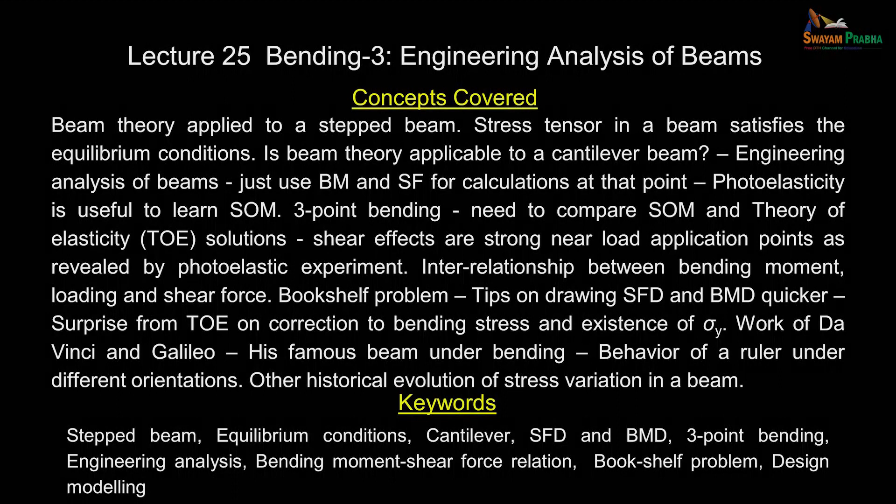Let us continue our discussion on bending of beams. We have developed the basic equations of strain and stress by considering the plane of symmetry. We got the expression of strain as minus M y by E Izz and sigma x equal to minus M y by Izz. On the plane of symmetry, we applied the loading also, and we got these expressions.

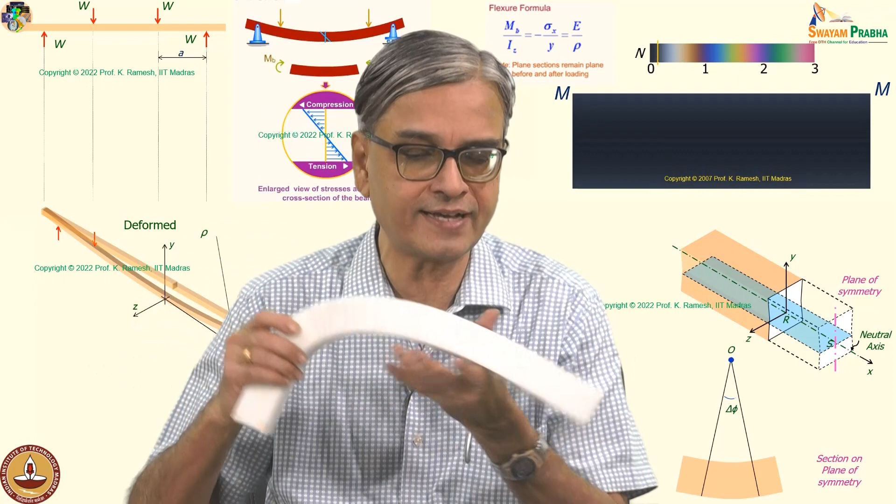We did not stop there. We took a counter example: suppose I take a beam like this and have large deformation. When I consider the thickness, what happens to the Poisson ratio effect? So we asked counter questions. When we developed the theory, in order to understand its limitation, we said because of Poisson ratio, you have anticlastic curvature.

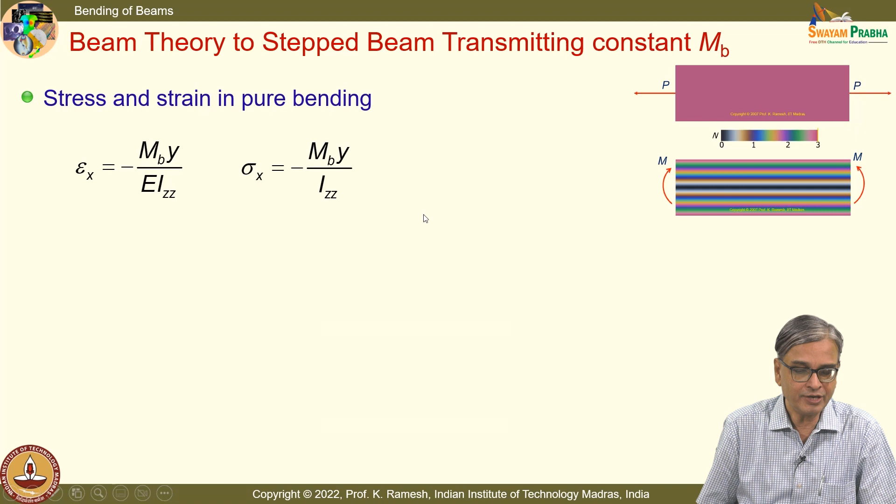Because we are working in small deformation, these equations are applicable. So we satisfied that. The moment I go to large deformation, I should work with the deformed configuration. We have not attempted to do that mathematics, but we satisfied that when I have small deformation, my equations are reasonably good. And we have also got the flexure formula.

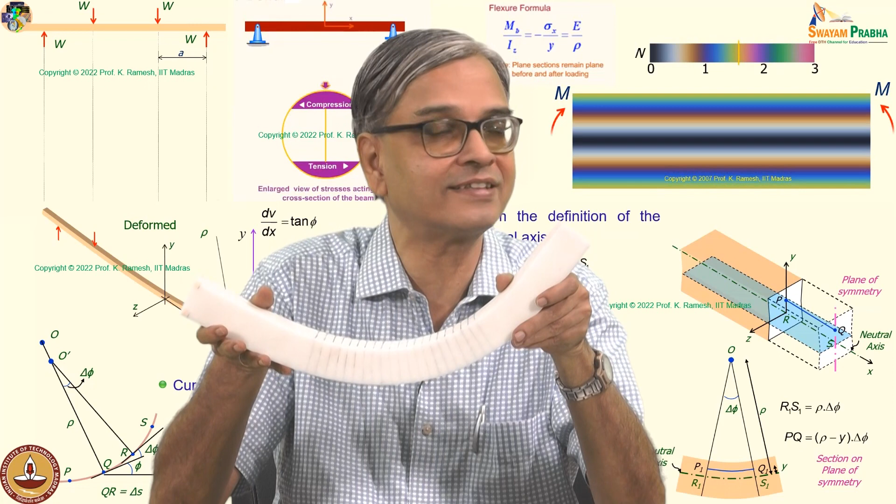I am not sure how many of you recognize that when I apply constant bending moment, the beam bends like an arc of a circle. Why? Because the bending moment is constant along the length, and the bending moment is related to the curvature. So you have arc of a circle.

And when we looked at a slightly different problem where I have a step, because in engineering practice you need a step so that you can locate the bearings, that's a simple modification I have made. But I have not done anything to the loading; it is still only pure bending moment.

When I have only pure bending moment, I get a very interesting result: away from this small zone having the step, I find the fringes are horizontal, and I also have the black line forming at the center. If you noticed the animation, you would have seen that black line was initially very broad, and it was becoming sharper as we increase the bending moment.

Like what we have seen in a beam of constant cross section subjected to pure bending, you see the same features even in a stepped beam. And you also have the definition of neutral axis: in the neutral axis, when I have a triangular variation, the stress value is zero.

You know, in photoelasticity we plot sigma 1 minus sigma 2. Both sigma 1 and sigma 2 are zero, and you also have this neutral axis. It was a very comforting scenario that whatever we developed based on a simplified appreciation of the deformation, we got the solution, and the solution is valid.

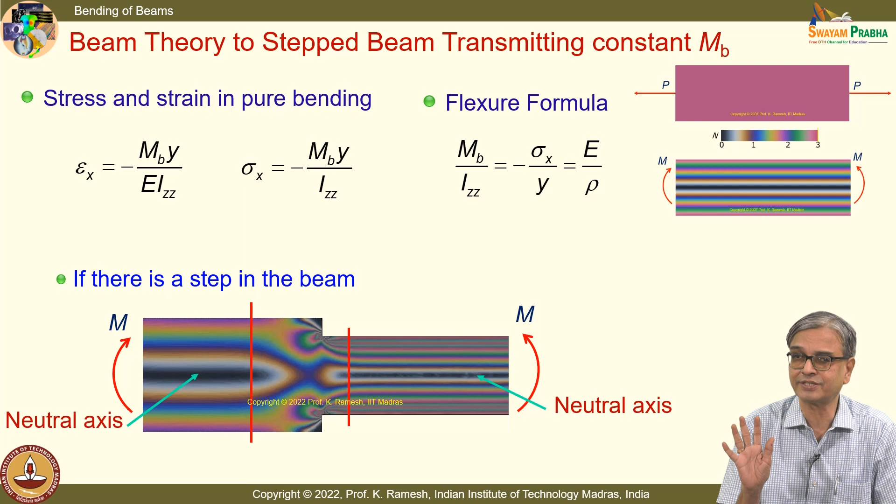Whenever we discuss, we will also have to look at exact solution and compare ourselves, to check if we are getting the right solution, which is done. And what you do is that in theory of elasticity. Even though I am not going to take theory of elasticity in all its completeness, you just look at what happens to this point A.

You know from your bending equation that sigma x is given as minus Mz y by Izz. And I said that you should cultivate the habit of looking at the stress component and putting that as a stress tensor. And what we have developed are differential equations defining the equilibrium of the solid.

We have not used it in this course till now. And whole of theory of elasticity utilizes these differential equations, solving this problem as a boundary value problem, and you get the solution which is exact, where you don't make assumptions about the deformation. You evaluate the deformation as part of your solution.

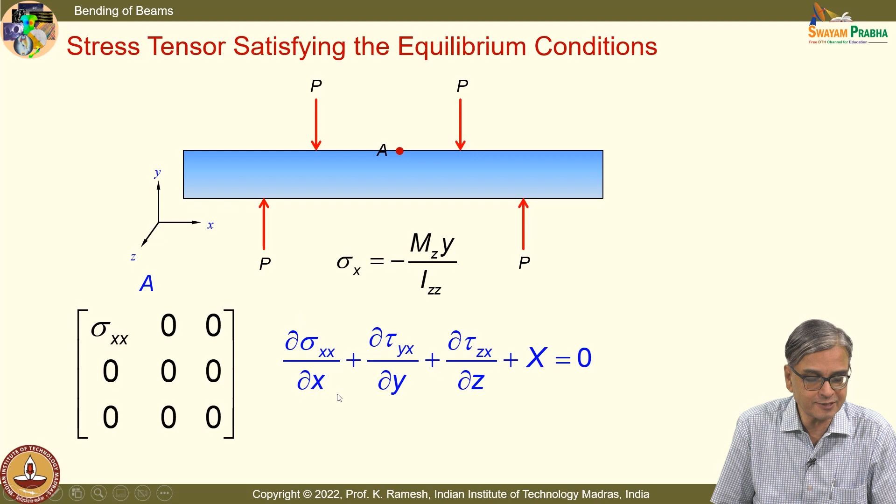And if you look at this, in the absence of body force, we have already said in strength of materials that shear stresses do not exist because I apply only pure bending. I have only sigma xx, and sigma xx is found to be a function of only y. So when I differentiate with respect to x, it goes to zero. It satisfies the equilibrium condition.

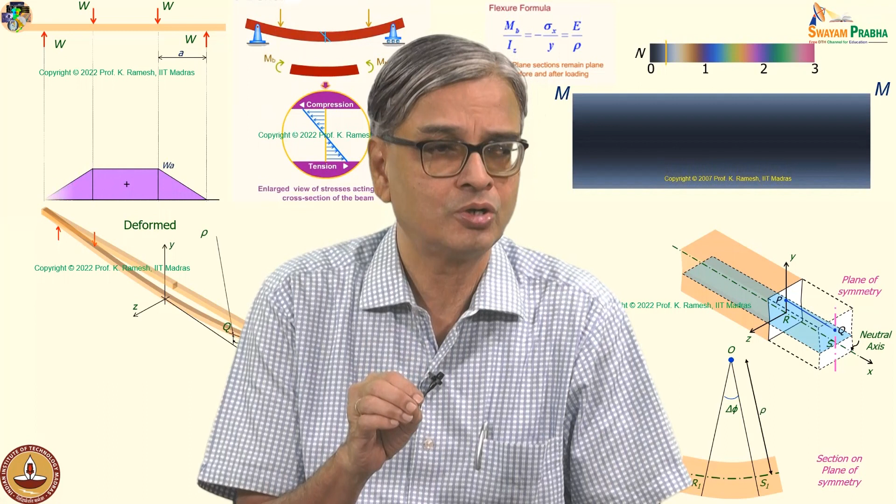Is the idea clear? So any problem that you do, you verify your solution with an experiment, whether it is an experiment based on bending of a beam like this, or when you look at photoelastic fringes. If the experiments are carefully done, what you get in an experiment is truth, and your theoretical development should conform to that. If it is not conforming, then you must find out what is its limitation, and in what way we can improve.

So you should always keep track of that. Experiments are truth if they are performed carefully. If you don't do the experiment carefully, then there is no fun.

Now what I do is ask a question: can beam theory be extended to cantilever beam? I make only one small modification. In the earlier problem, we didn't have shear force. In this problem, I take a shear force which is constant on the length of the beam. Because it is constant, I find the bending moment varies along the length of the beam. It does not remain constant, it has a linear variation.

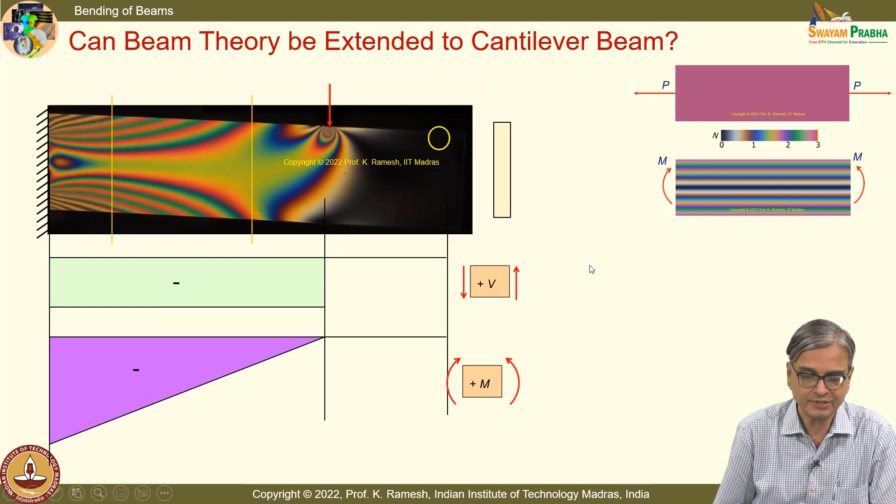Now, what I have here is, I have the bending moment varies linearly along the length of the beam. That means when I go from this point to this point, the bending moment is increasing. Suppose I say I can use the flexure formula, which I have it here, and then I put the bending moment corresponding to what I have in the bending moment diagram and evaluate the stresses.

The bending moment is varying linearly, and when I move along this direction, you would anticipate stresses also increase. If I have stress occurring here, the same value of stress occur at a lower place because the bending moment is higher. Is the idea clear? That is happening.

The bending moment is varying linearly, but I find that this is not varying linearly, but this has a curvature. The observation is correct. But you have one more difference.

I have a bending moment varying along the length of the beam. I also have shear force. I have a new addition because of the way the beam is loaded. So I have to account for what way this shear stress is going to influence. The shear force is going to cause you shear stress. And long back we have discussed, you have this as a free surface, this as a free surface. You can find out the distribution of shear stress variation from our strength of materials. Whatever result I get, because it is a free surface here, free surface here, this should go to 0 at those points. That we have made it clear.

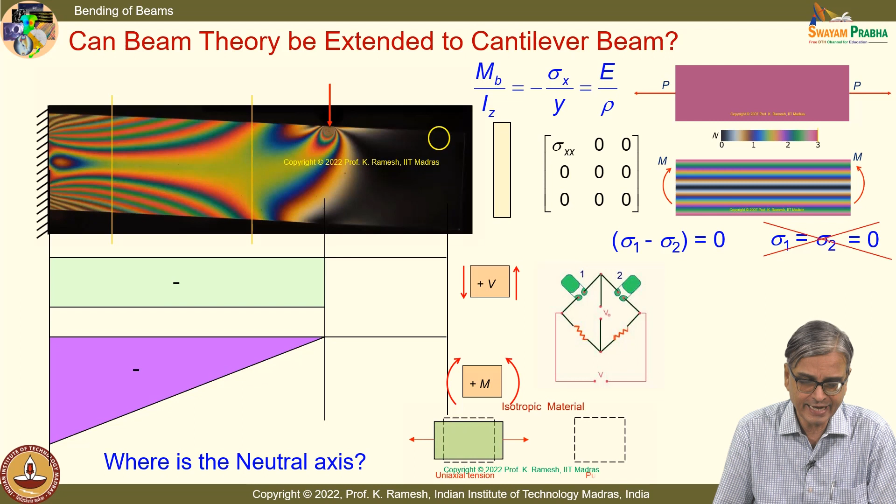At this stage, what we say is you can extend it to analysis of a cantilever beam. The moment you say it transmits shear, I am going to get shear deformation, which will violate plane sections remain plane before and after loading. So I must call whatever analysis I do as engineering analysis of beams. Your exact analysis stops at pure bending—anything other than that, even though we exploit those expressions, you need to carefully look at that as engineering analysis.

I was quite happy that you have done a beautiful set of experiments. This is what I said: when you do the experiment carefully, experiment is truth. If you don't do the experiment carefully, experiment is not truth. And whoever obtained this fringe pattern, I should compliment, because it's very difficult to handle this model in the polariscope and apply load with your hand.

When you do an experiment, you also anticipate results—no one does the experiment blindfolded. Before you do the experiment, you have a hypothesis; you want to see whether my experiment gives that hypothesis. Because I have been repeatedly showing that you get constant color in the case of axial force, that has prompted you to adjust your loading so that you got constant color. The same experiment done by some other group, you didn't get constant color for the entire length.

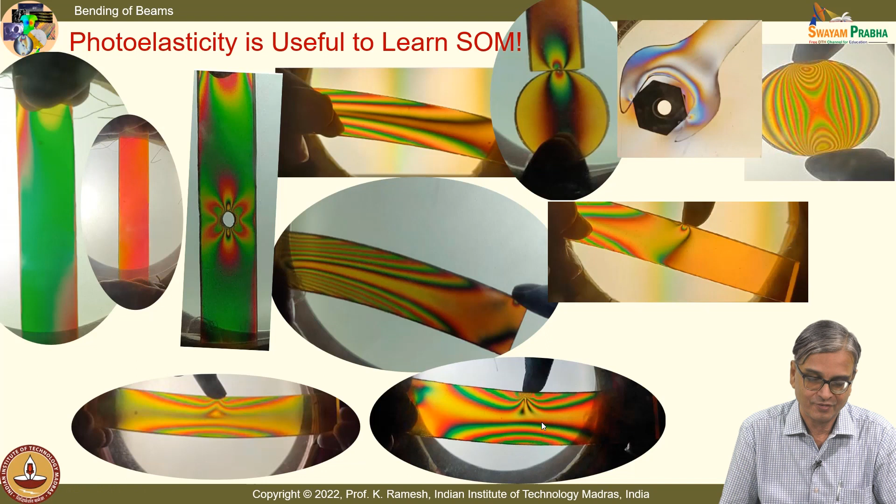And you have also done 3-point bending. This needs a little more attention—we have to see whether my theory, my strength of materials solution, is giving me the result in all its completeness. We will initiate the discussion; you have to wait for shear force development to complete the discussion.

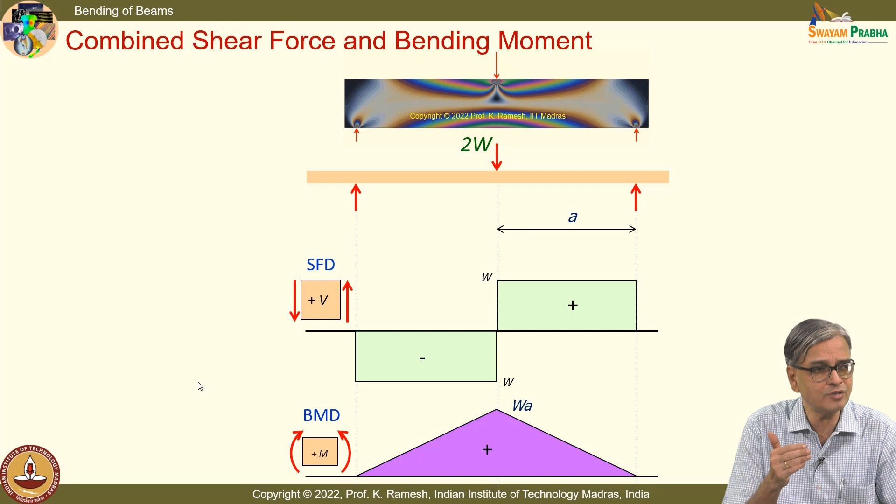I have this as a 3-point bend, very similar to your cantilever, because when you look at it, the shear force is constant and your bending moment is varying linearly. So if I can apply my strength of materials solution to a cantilever beam, I can also apply it to 3-point bending, because this shares the same feature on both sections.

I would like you to take a photograph of this, because these fringe patterns are very interesting. That needs to be looked at and discussed.

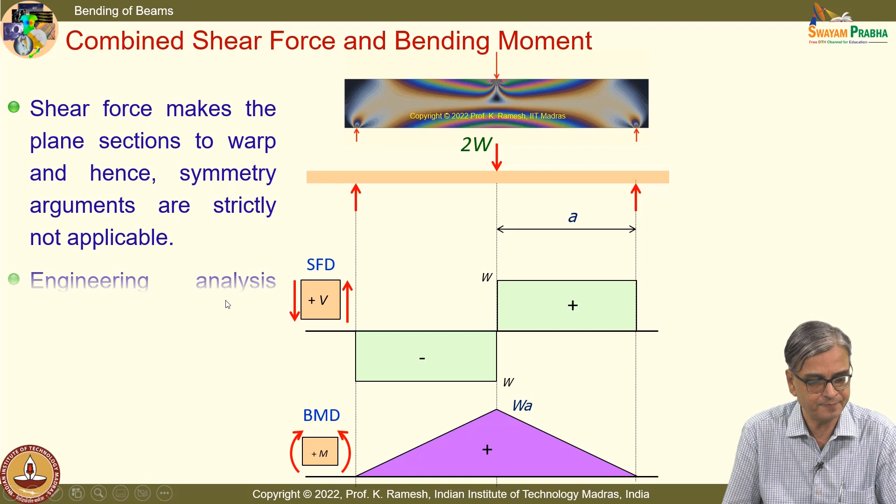The moment I have introduced shear force, it is going to warp the section, so symmetry arguments are strictly not applicable. I want to emphasize, we don't give up as engineers. We do the analysis, recognize that we have made an approximation, and label this as engineering analysis.

So the bending stress distribution is valid even when M varies along the beam. Now we will have to investigate how this is influenced by the shear stress introduced. Whatever fringe pattern I have shown here agrees with the theory of elasticity solution, and we have to investigate how they compare with the strength of materials solution.

If I have to compare it with the strength of materials solution, I should also know how to calculate shear stress variation across the depth of the beam, which we have not done till now. We know only the bending stress distribution.

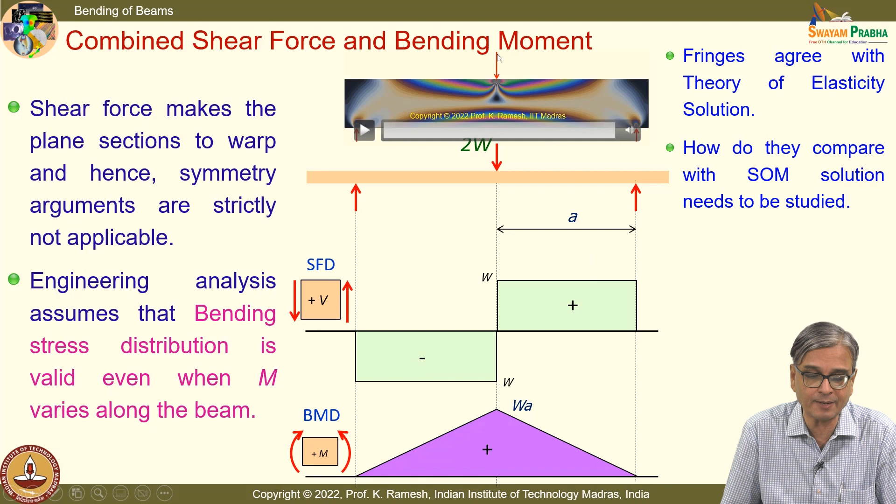At this stage, I want you to observe how the fringe patterns are. I am also having a bigger blow-up of the fringe patterns developed. What I want you to observe is that the bending moment is varying linearly across the length, it's increasing.

We have seen that the fringe is having a curvature. When you come closer to the load application point, this curvature has a sharp turn. Is the idea clear? Do you make that observation?

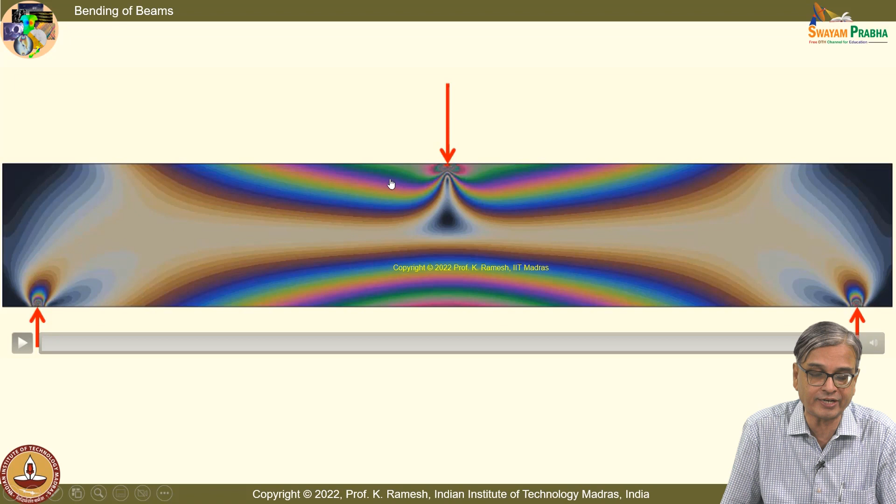We have to understand whether my strength of materials solution, what we are going to develop in terms of shear stress, is good enough to capture these or not. You'll have to wait, but have this observation in mind. When we develop the discussion, we will find an answer.

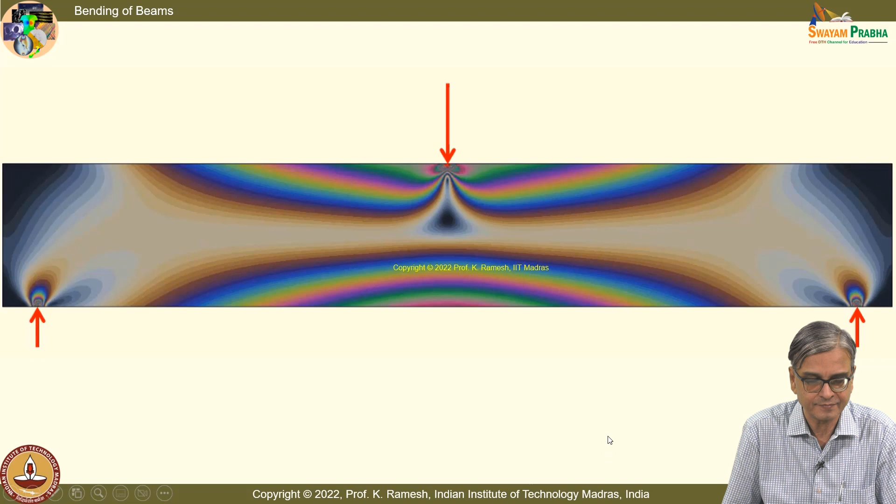The moment I introduce a shear stress, I am not going to have these sections remain plane anymore. They get deformed, and this is based on the final solution.

You can make certain observations of this. See, this line is perpendicular to this free surface. So when the deformed section is perpendicular, that means the original 90 degrees is preserved. What would you say about shear? Shear is zero. Shear is a change of the original right angle.

Is the idea clear? I have also made a conjecture that shear is maximum at the center of the beam, and I have the maximum deviation from 90 degrees at the center zone. So the plane sections have warped.

Our whole beam analysis was based on the premise that plane sections remain plane before and after loading. On that basis we calculated the bending stress distribution and bending strain distribution, and that is clearly violated even in the simplest case of a simply supported beam.

Where does this influence apply? That's question number one. Question number two is, what is the variation of shear stress? Question number three is, what is its magnitude in comparison to bending stresses? All these aspects are important.

First answer is, as long as I have a slender beam, meaning the depth is very small compared to its length, shear effects can be ignored. When the depth increases, you have a coupling between shear and bending effects. There, unless you bring in the shear effects, your beam theory solution is not complete.

You also have idealizations for that. Bringing in shear effects, you have what is known as the Timoshenko beam. That's all postponed for your higher level of education. For this course, we will confine to strength of materials, and shear stress variation over the depth of the beam is non-linear.

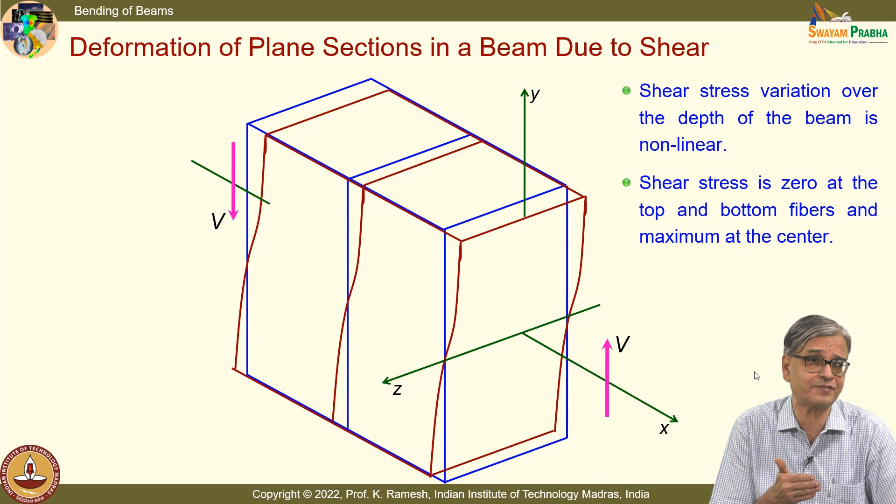We have always seen that in the case of twisting of a shaft, shear stress was varying linearly, and in the case of a beam, axial stress was varying linearly. We find that shear stress variation is non-linear. As we conjectured based on the free surface argument, shear stress is zero on the top surface as well as the bottom surface, and reaches a maximum at the center. I gave evidence from photoelasticity fringes that it was no longer black—I have a color.

We'll also have to handle a loading that is varying on the beam. One of the things you normally take, particularly when dealing with civil engineering construction, is that self-weight itself is a load acting on the beam. This you have already developed in your earlier rigid body mechanics, and this is how you verify whether you've drawn the bending moment and shear force diagrams correctly in comparison to the loading diagram.

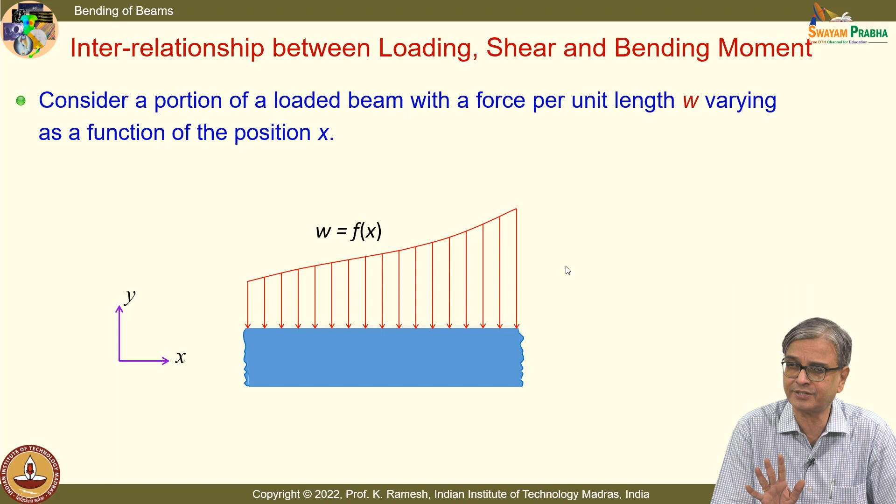It's only a recapitulation, not a new derivation. Recapitulation with the symbol for how we label positive shear force and positive bending moment. That's the only difference; otherwise this you have already done in your earlier course.

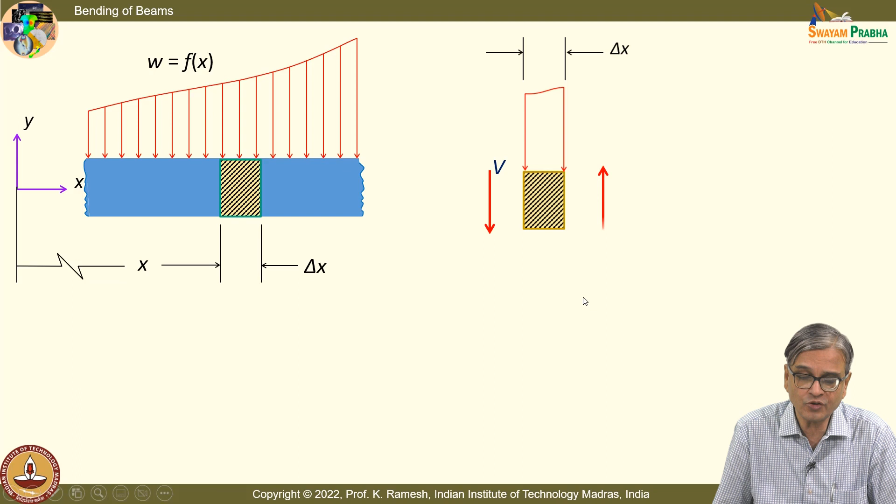So I take a small section and write all the quantities I know. I recognize this has a finite length delta x, so I anticipate there's a variation of shear along the axis, and also a variation of bending moment along the axis. We take a positive surface with positive direction of shear as positive. The only difference is we've learnt it in a different symbolism of sign convention. Otherwise you have already been taught how to get this.

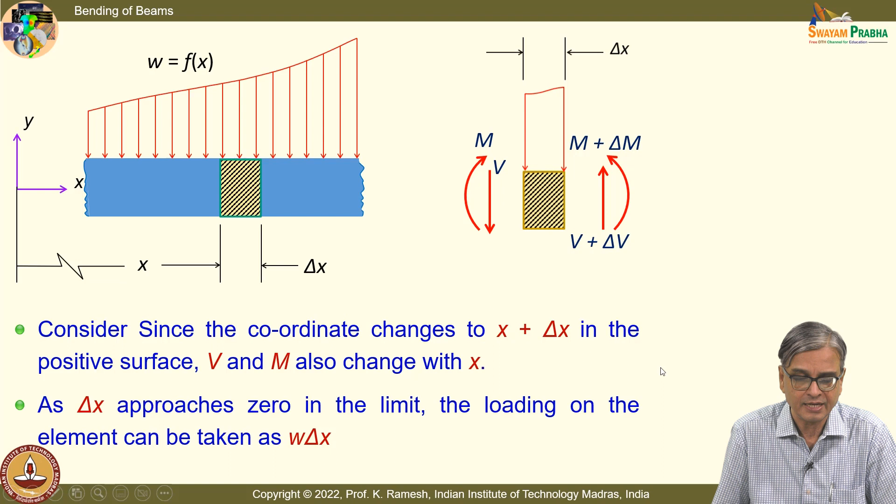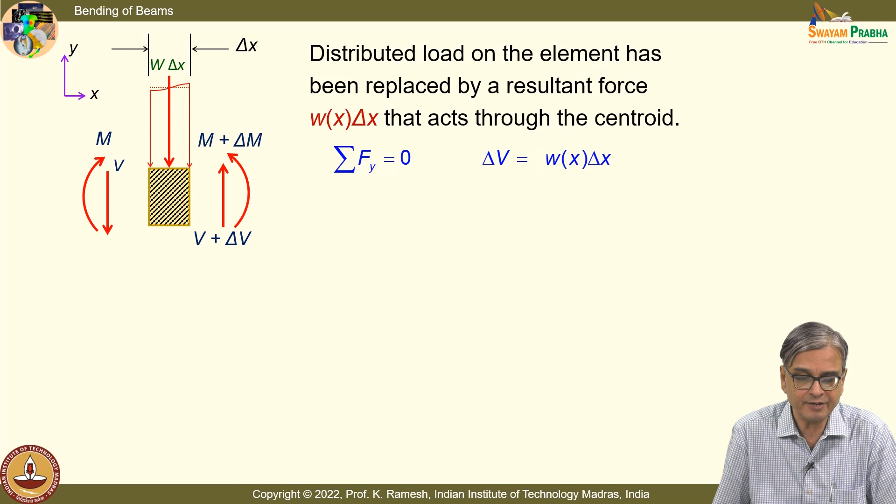In a short distance delta x, I can put the value as w into delta x, and replace this as a force. I can write the force balance and get the interrelationship. So if I do sigma Fy equals 0, in the limit delta x tends to 0, I get the important relation dV by dx equals W, the intensity of loading.

And when I do the same for moment equilibrium, I get another interesting result: dM by dx equals minus V. If you had used the opposite sign convention, you would have gotten dM by dx equals V. That's where the difference comes.

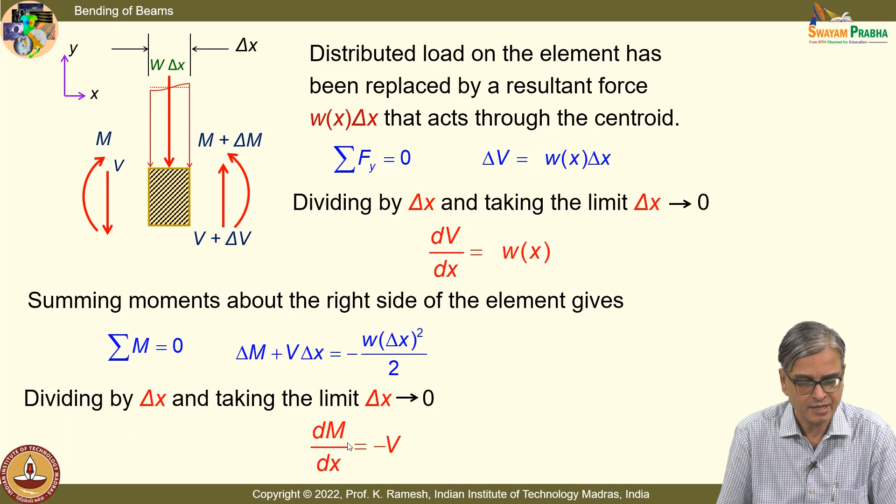What this says is, if I know the shear force diagram, I can comment on the slope of the bending moment diagram. That's one way you verify your plotting by hand. If you have an equation and put it in software to plot, the software will faithfully fit the curve. But when you do hand plotting, you have to know how to do it.

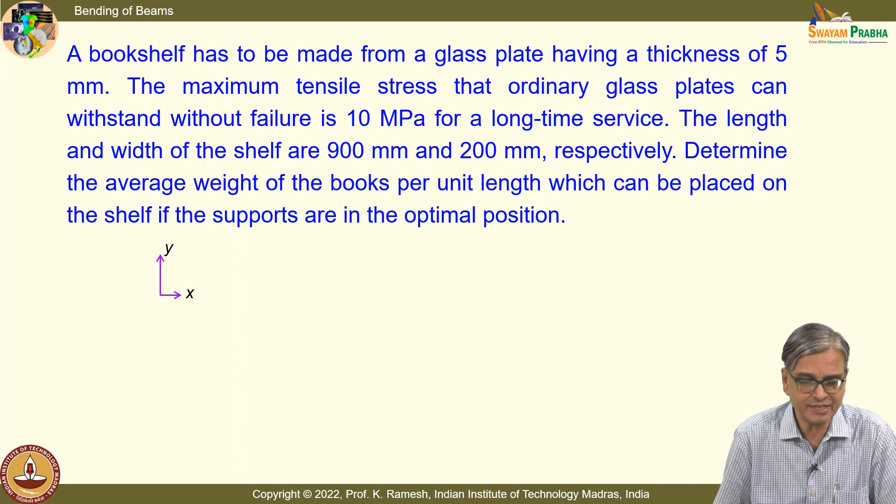Let us solve one very down to earth, simple problem. At the same time it's very interesting, and it also has components of modeling. Consciously, I want to bring this in -- you become better engineers only when you know how to do modeling.

First, when you have a stack of books, none of them -- if you take 5 books, each will have different weight and different size. You don't have one uniform book unless you buy an encyclopedic volume published from the same publisher; if you take 10 of those, they'll have the same size and weight. But if you buy books in fluid mechanics, solid mechanics, material science, all of them will be different.

So the first idealization you have to make is to translate this into a uniform loading. You should not exceed that -- that's what I want you to recognize.

What is given is you can make a nice, elegant support with a simple glass plate, of length 900 millimeter and width 200 millimeter. It can accommodate many of your books. The question also asks to determine the average weight of the books per unit length which can be placed on the shelf if the supports are in the optimal position.

You have to understand what is an optimal position. In fact, there is an embedded clue in the question itself: the supports are not put at the end. They're put in a manner such that the length A is greater than L by 2. You are given a clue.

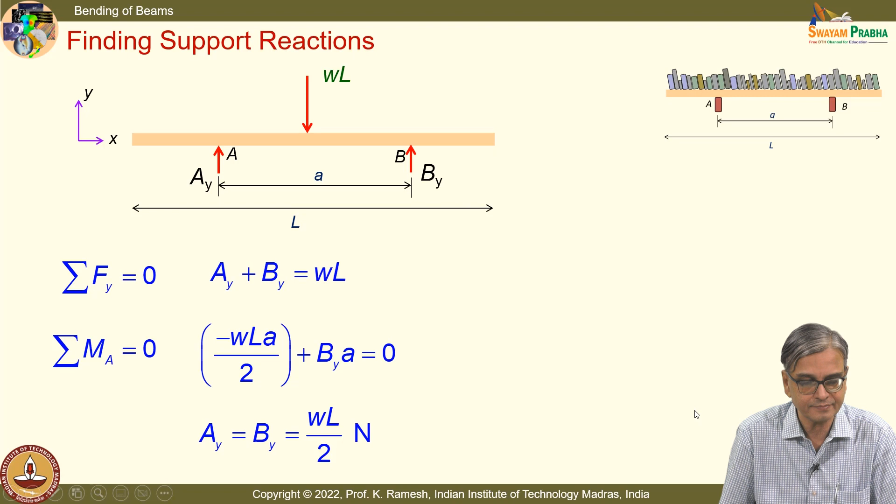I've also been saying that for a problem like this, you should be able to draw the bending moment and shear force diagram quickly. So if you give me this, I will find the shear force at this point, and at this point -- that's good enough for me to draw the complete shear force diagram. And for the bending moment, I'll also find what is happening at the center. So 2 points are sufficient for the shear force, and 3 points are sufficient to draw the bending moment.

Because the loading is W Newton per meter, I anticipate my shear force for the entire length of the beam to be a first degree curve, because I know dV by dx equals W. When I go to bending moment, I have dM by dx equal to minus V. So if the shear force is a linear curve, bending moment will be a parabolic curve. So all that information you use it.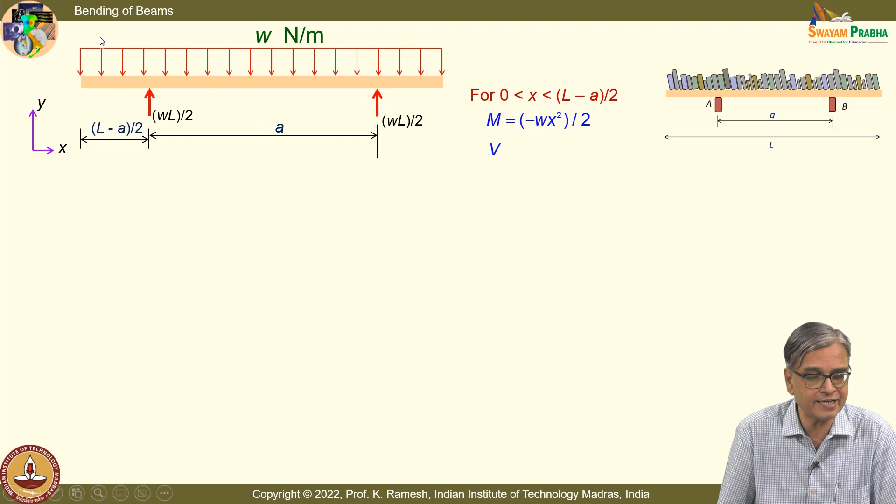If you do from the conventional point of view, I can find out what is the expression for M. If I take a section and then do it, I can do this. So I will do that for one section, another section, and the third section. That is for completeness. Completeness, you have these expressions. I can get it for this.

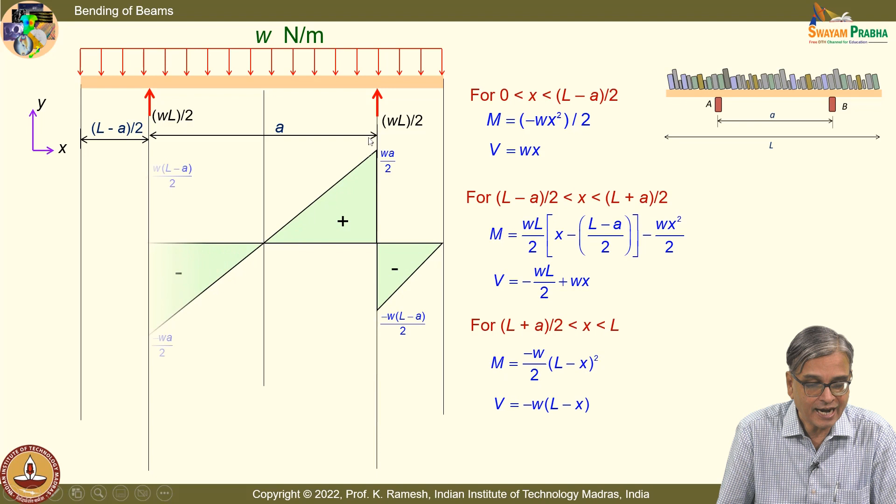But when I want to plot, when I start here the shear force is 0 as well as bending moment is 0. So I know 2 points already to start with. At this support I have WL by 2. From this point, I will go up by WL by 2 - that's what your mathematics also will give. If I know this point, I know this is a straight line, I'll join these two. Again, go up by WL by 2, and then come back to 0. So you can draw this very quickly.

You have to build up that acumen. As you learn the course, you can't be saying that you will take half an hour to solve this problem.

And similarly, when I go for the bending moment, I know that this is a second degree curve. The question is whether I should draw it like this or draw it like this. That you look at based on your slope. See, slope is 0 here, slope is positive here. You have dM by dx equal to minus V. When V is 0, slope is also 0. When V is more and more negative, slope is also more and more positive. So that is how you decide why I have to plot the curve like this.

Now you can quickly say, as an engineer, suppose I put the support at the end, what would be my bending moment diagram? Bending moment diagram will be a parabola from this end to this, and your bending moment peak value will be much higher than this. Do you see that difference? So one clue you get is, by adjusting the support, you can achieve a situation where you can minimize the level of bending moment maximum occurring in the beam. So that is a design tool.

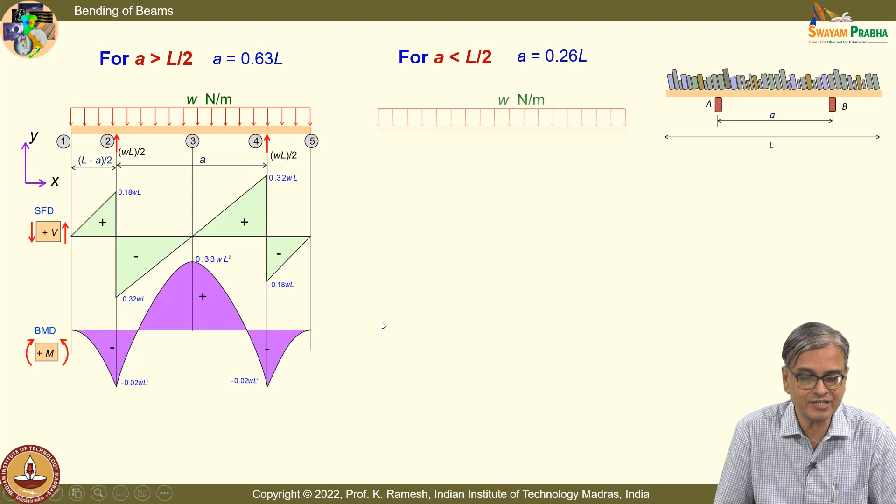When I have A less than L by 2, I have everything on one side. If I start from this, I will not be able to find the optimal position at all. Only if I start from this kind of bending moment diagram do I have the opportunity to find the positive and negative bending moment and equate the two.

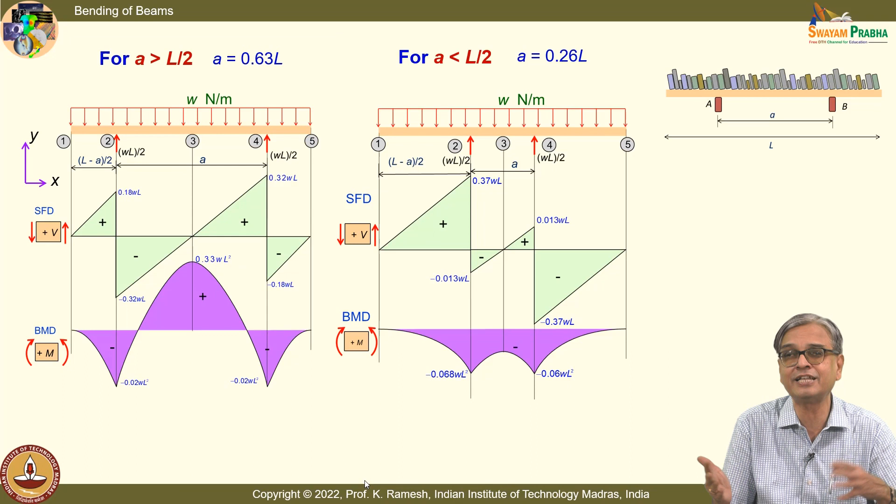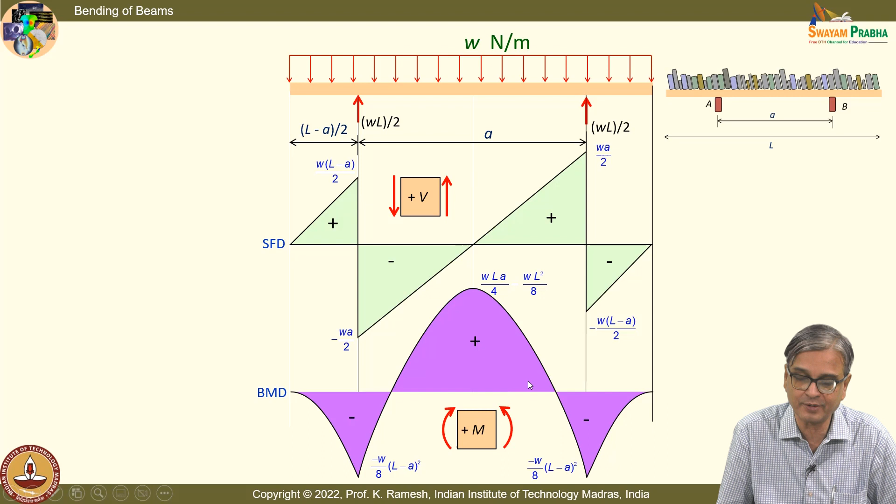So it's a design scenario. What we do is simply equate the two magnitudes. The same shear force and bending moment diagram is replotted, and I equate these two values.

I get a quadratic expression of A squared minus 4AL plus 2L squared equals 0. From this I can solve for the value of A. This means I have adjusted my supports such that the bending moment peak here and this peak are of the same magnitude. That's the best optimization I can do for the given problem.

When I substitute this, being a quadratic expression, I get two roots. You have to select the appropriate root—only one will lie within the beam. So I have this as 527.21 millimeters.

Once you substitute here and apply the beam theory, hopefully the beam theory is applicable—we have to verify this with theory of elasticity, which we have not done yet. We will also do the verification, and if the deviation is small, we keep our eyes half closed, pat our back, and say I have got a value good enough for my design. This is how engineers operate.

You have to get the core of the problem—that is more important. The core here is that bending stress varies linearly over the depth of the beam, whereas when I apply an axial load, it is constant.

Recognizing that it varies linearly was the biggest challenge the scientific community faced—it took 200 years. You should recognize that. We will also revisit the history today, because now you are more equipped with beam theory, you can appreciate what aspects they could reveal and what they could not find out in their development.

So I have this bending moment equated, and you get this expression. When I substitute the value of A which I calculated, I get the maximum bending moment magnitude. And I have the bending equation available—whenever you solve a bending problem, write this in one corner and start, because you are going to exploit this equation. So I can write sigma bending max as M B max divided by I ZZ into y max.

Then you have the cross section like this, with breadth and height. So for this rectangular cross section, here's how to calculate the moment of inertia. And when I use the information given in the problem that it cannot exceed 10 MPa...

I find out what is the value of W. I have this as 0.48 Newton per millimeter.

Let me ask you a few more questions. I am not going to give you the answer—I want you to think. Suppose I want my W to be not 0.48, but doubled. What are the options that I have to do this?

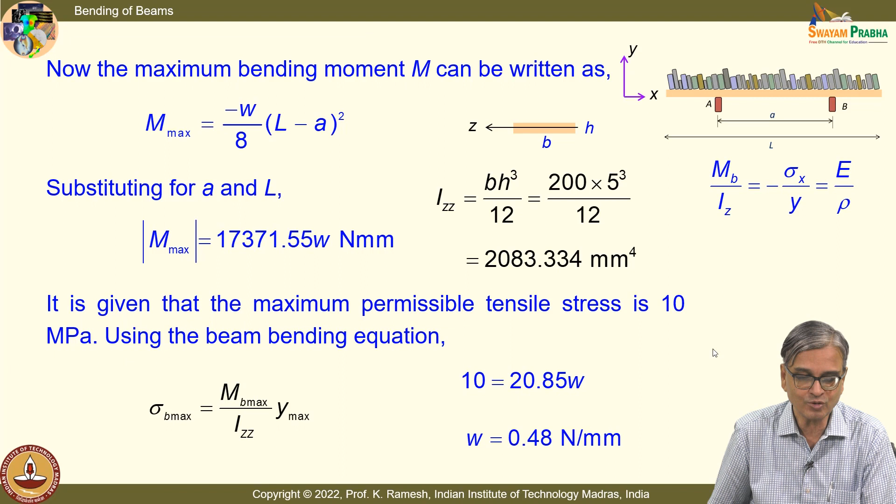Now let us look at whether this is supported completely by theory of elasticity. There are surprises - you have not calculated the shear stress. You can take it that this is varying parabolically, non-linear, anything other than linear we'll say non-linear. It may even be a simple second degree curve. We have obtained from strength of material that bending stress varies linearly. Please make a sketch - this you will not find in any books you have access to. Also appreciate stress magnitudes are not to scale - we are only discussing the variation over the depth of the beam. You will find that what we get from strength of material up to this point is perfectly correct.

We have also done discussion on free surface. Suppose I want to discuss what happens on this surface - is this surface free? I am deliberately applying a vertical load, so how can that be free? In the development of bending of a beam with constant bending moment, we have idealized sigma y as 0. But this is one of the most common loadings that you have, and you are definitely applying sigma y - you are applying a force to generate sigma y. So when I solve the problem as a boundary value problem, taking the differential equations, I am definitely going to have sigma y, and it will die down to 0 at the other edge.

And there is also another surprise: even the linear variation of bending stress is no longer supported by theory of elasticity. You have a correction term to sigma x. So you have two additional quantities - sigma y exists, and I have not drawn these to scale. You will find that these are second order effects. The small variation can be ignored when you use the expression for bending stress which was developed in strength of materials. Is the idea clear? So you have to understand that we are doing only engineering analysis, and you have to appreciate the limitation.

And I have raised a point in a 3-point bending. There is something we have to discuss about the shear stress, whether strength of material predicts it correctly or not. You have to wait until we develop what we do in strength of materials, then compare it with theory of elasticity. So you should appreciate that whatever expression we have got in strength of material is very useful, but it has its own limitations. Appreciate the limitations.

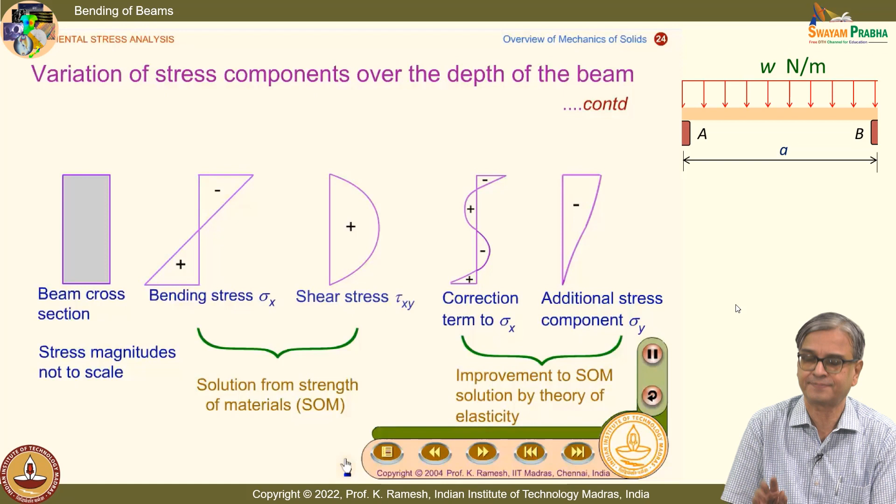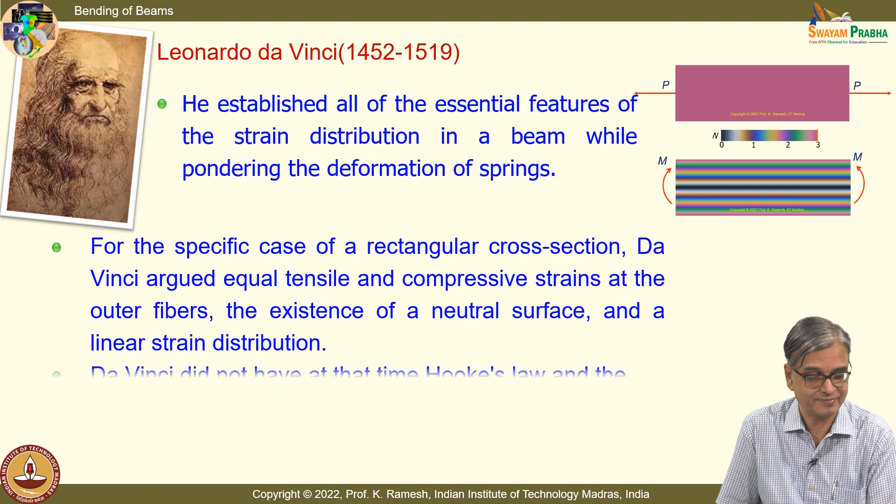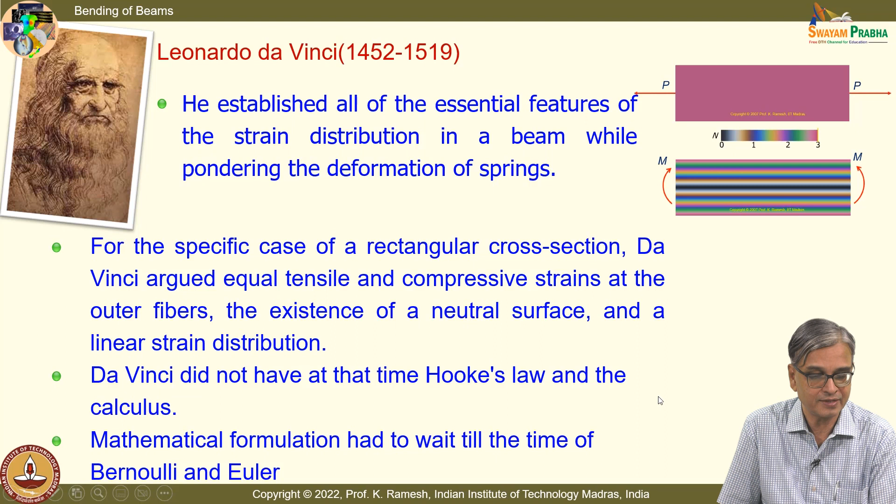Let us go back and quickly go through the history, because we have already seen this - you can appreciate certain aspects now better. Leonardo da Vinci was the first one. He established all the essential features of the strain distribution while pondering the deformation of springs - that is his wisdom, we have to say. For the specific case of rectangular cross-section, Da Vinci argued equal tensile and compressive strains at the outer fibers - that's what we also say now in strength of materials. He could also establish the existence of a neutral surface and a linear strain distribution. What he could not achieve - he did not have Hooke's law, so he could not translate this understanding to stresses. And second, he had to wait for the mathematical formulation of Bernoulli and Euler, and he was also not in a position to give recommendation how to design a beam.

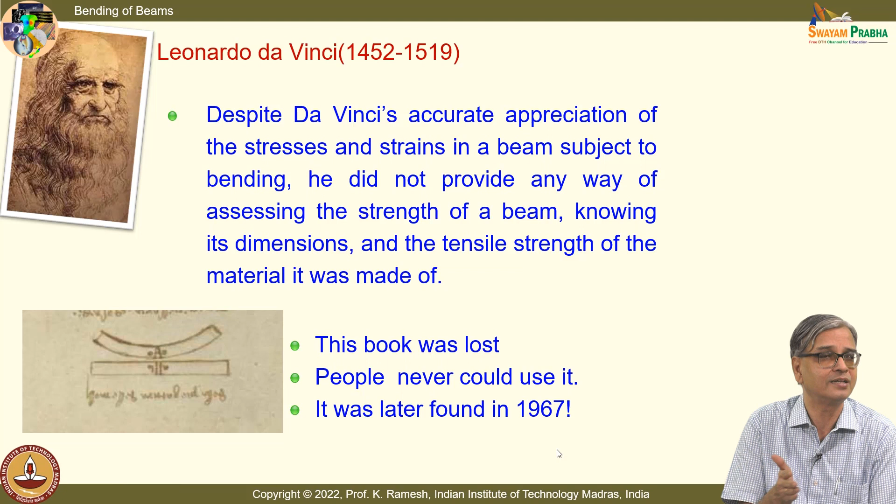How, if I know the strength of the material, to get the dimensions of the beam. And when you dig into the history, you find that he had written a book with all this information, but this was found out only in 1967. So all the early researchers, without his book, had to struggle and find out what is the beam theory.

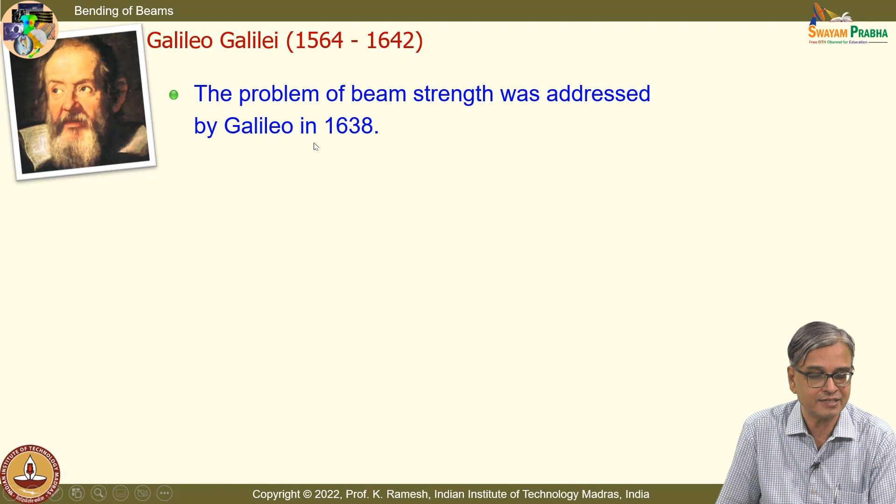So Galileo was the first person - he said the beam strength was addressed, and he was able to give some numbers based on his experiment. Even at that time, this was a very difficult experiment. Can you recognize he made a statement: a ruler offers more resistance when lying on the edge than when lying flat. Do you agree with this observation or not?

Do you agree with this observation or differ? I don't get the answer - you nod your head, what do I make out of it? Do you agree or not? You agree - can you tell me how you say that this is better than this? What is the aspect that you can say mathematically? Very good, very good, I'm happy. So bending rigidity - I have E times I_zz, and you know very well I_zz for this cross section is very high compared to this.

So this observation was correct. They were learning it experiential knowledge was very good. I have been using this beam. This is also made of plastic. This has some cross section, and this has a cross section which is much larger. And you know very well that this has hardly any bending rigidity. And I needed this to show you

warping in case of twisting, and also for anti-clastic curvature. So what made the difference between the two? This has more rigidity than this because of its Young's modulus. So EIZZ is a very important aspect when you are looking at anything to do with bending. Similarly, GIP for torsion.

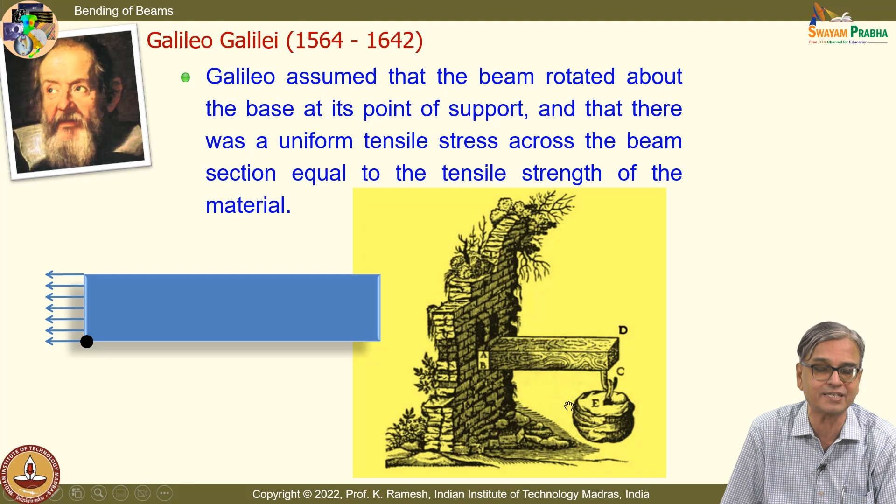And he had a good idea of how the beam failed and things like that. And he could not find out the variation of stress. The variation of stress was very difficult. He had some idea that this failed here. It said it's because they were accustomed to only axial force transmitted. So the same idea of equal force was

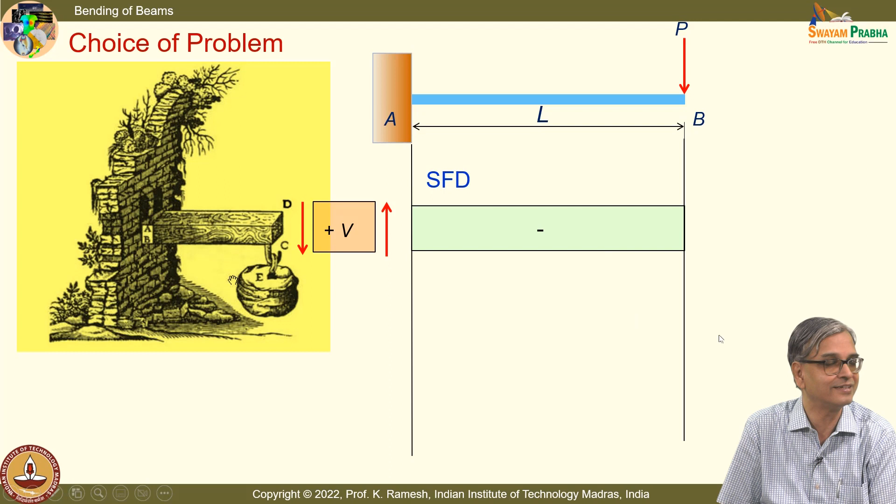obscuring their thinking. And now you can say that he had taken a complex problem, because I explained how your cantilever beam is difficult to handle, since it has shear force, and shear force introduces plane sections that do not remain plane, and you have bending moment varying.

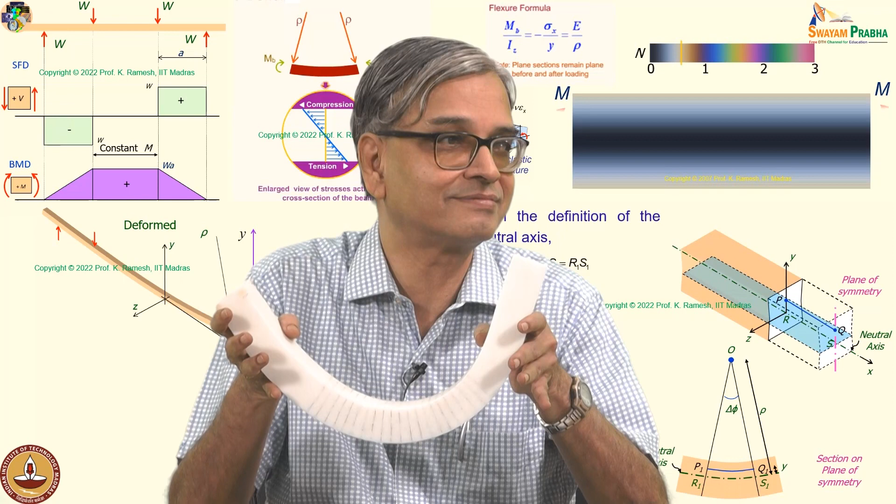We were very clever. We took a problem deliberately that will transmit only constant bending moment. He didn't have that luxury. That is why he faltered. He could not proceed beyond a particular point. And you also see that this beam is not slender. The problem is complex because it is not a slender beam.

The depth is important. I said the shear and the axial force, the coupling takes place when these two are - the depth is comparable to the length. And the material - he was not having isotropic material. He was having wood. So they could not proceed. So when you want to solve a problem, you should know how to simplify and get the core of it.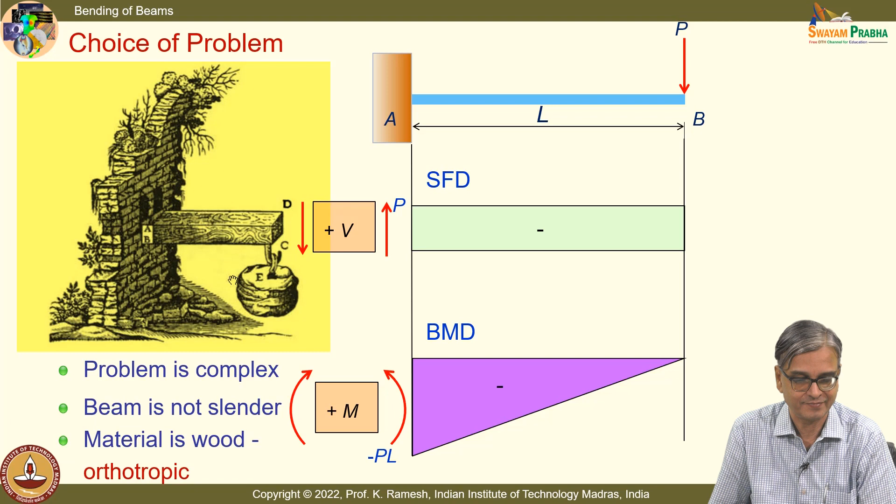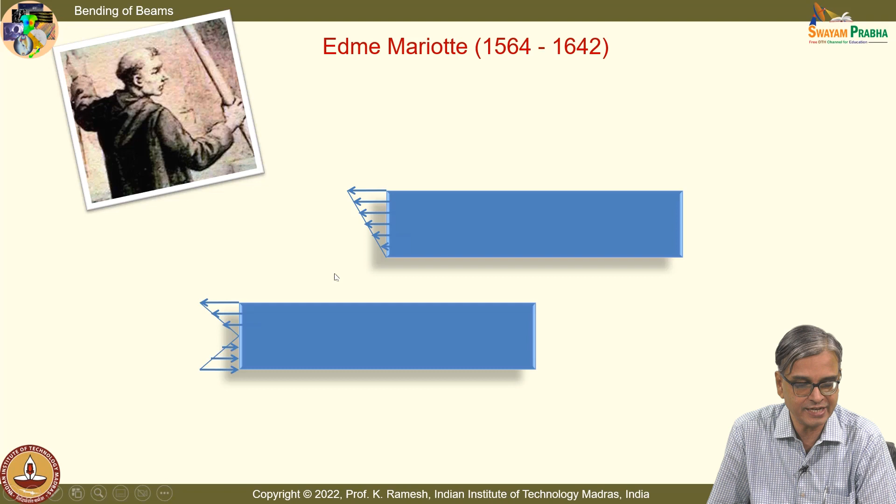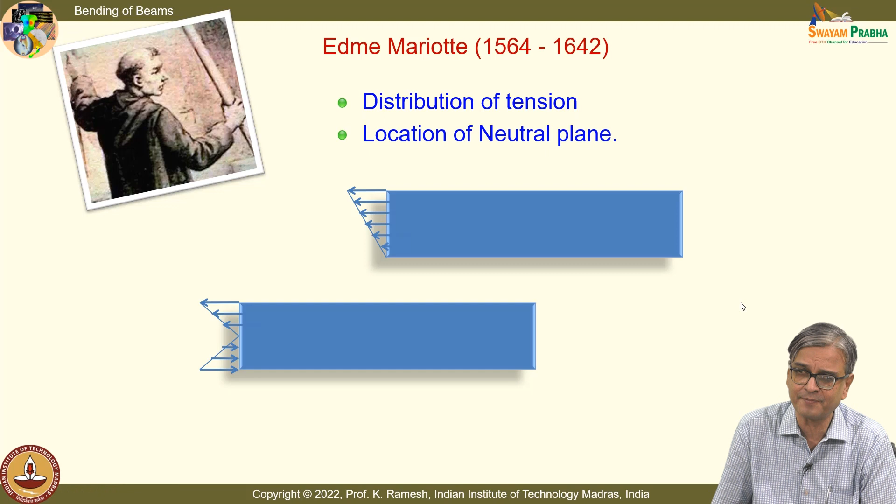And Mariotte had some idea that the variation is linear. He was also not able to succeed, but he showed both a variation like this as well as a variation like this. But it's not clear why he obtained two of them. So they were very close to the solution but did not achieve it. He could also say the neutral plane.

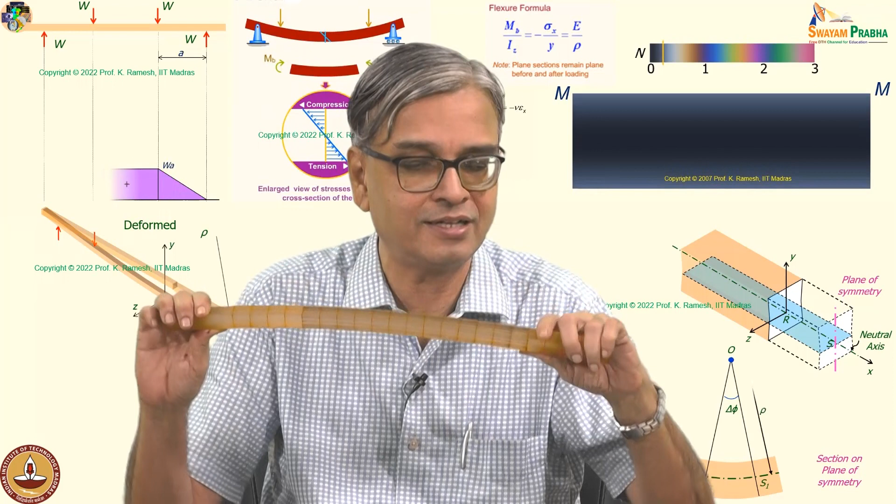And Parent, he got this as triangular, and he had this neutral axis shifted, and stress distribution from tensile at the top face to compression at the bottom. They were always looking at bending like this, like what I was showing. So the top surface is in tensile and the bottom surface is in compression. So he was able to do it. And so the triangular variation is credited to Antoine Parent.

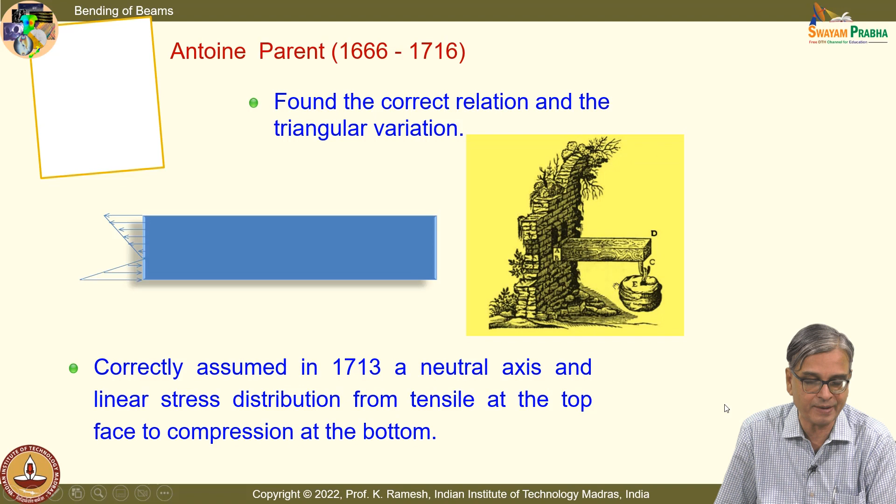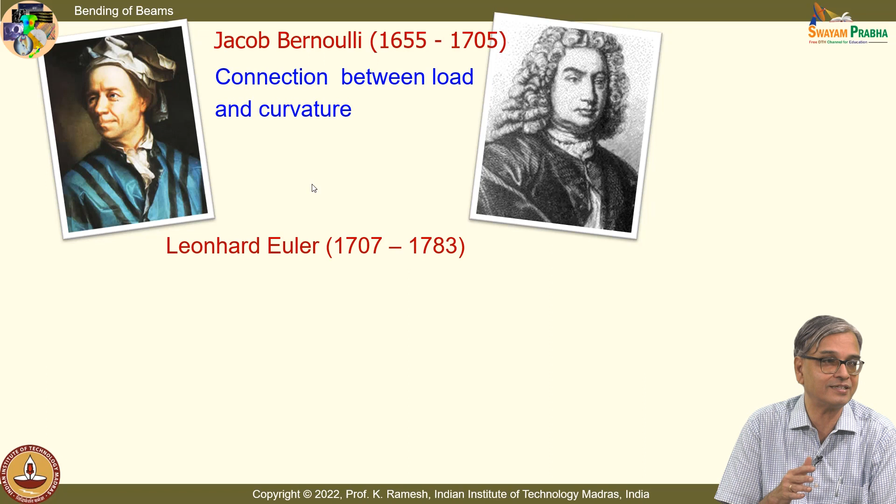The breakthrough came only with Euler and Bernoulli. They linked load and curvature. Unless they could bring in the deformation, the beam problem was not solved. So that took such a long time to develop. One was a Swiss mathematician, the other a Dutch mathematician. They independently derived beam bending formulae and are credited with development of beam theory in 1750.

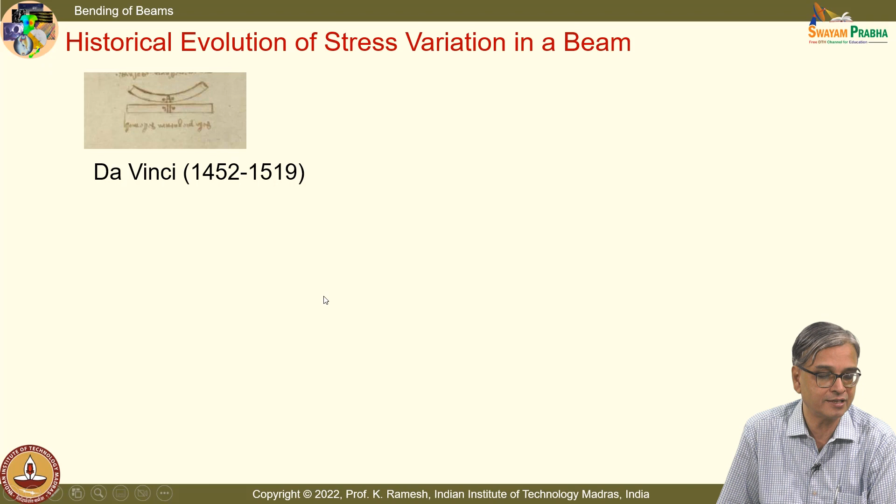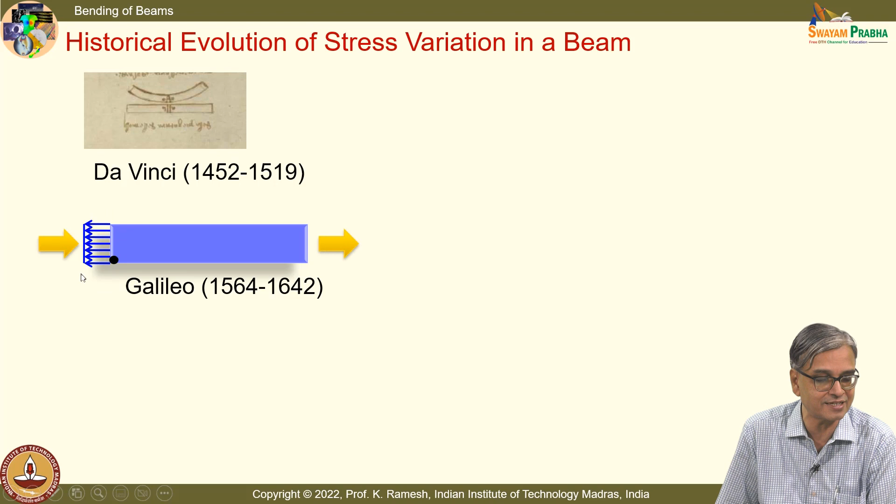But the actual distribution was credited to Coulomb. And if you look at the distribution, the contribution by various scientists, we can summarize: Da Vinci had all the idea, but his book got lost. Galileo could design beams, could solve the problem halfway, but he assumed that the stress is uniformly distributed. And you have the first appearance that it is varying in a triangular fashion in one form. He also had mentioned this, without assigning reasons.

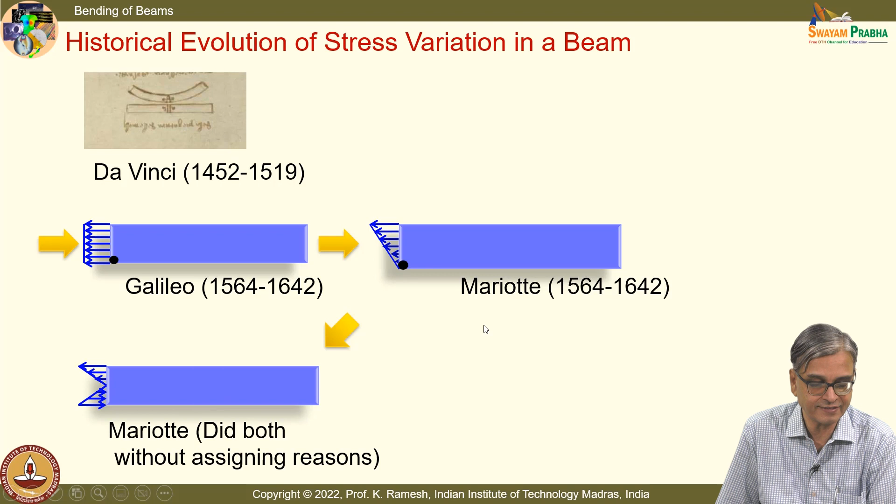And Parent correctly said that you only have this kind of variation, with his neutral axis shifted. And finally, you have Coulomb, who solved the problem of beam bending. So what you have learned in these few lectures has taken 400 years for its evolution. It's not something simple. So if you have doubts, don't feel annoyed. Great minds have had these doubts, and they didn't have access to simplified experimentation.

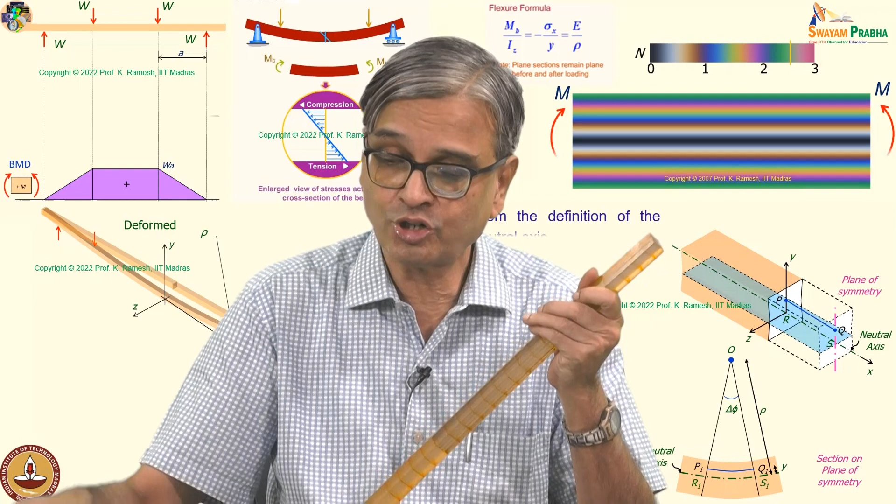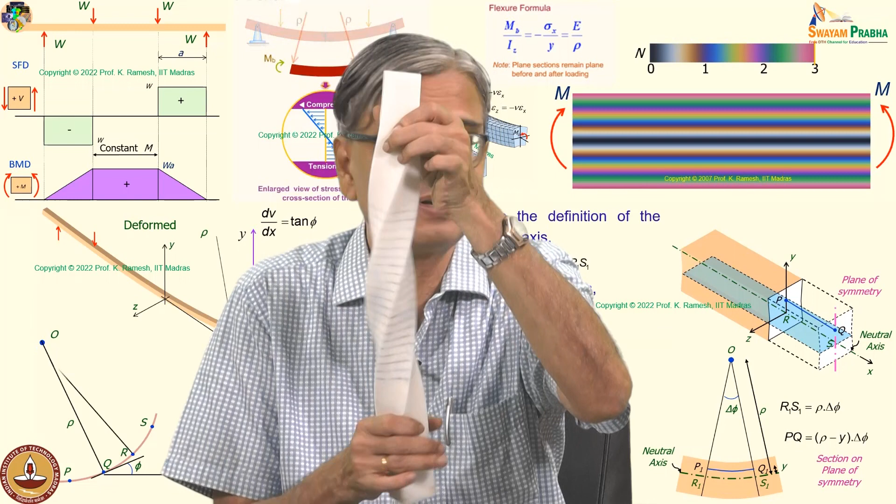And in fact, even in IIT - this I could get easily in a commercial shop. And in order to show you warping in torsion, I had to get a material which is very soft. We had to take some effort to get this material done. So in this class, we have looked at what are the limitations of the strength of materials approach to beam theory. We said it is derived only for a beam transmitting constant bending moment. Anything other than that can be considered only as a good approximation for engineering analysis.